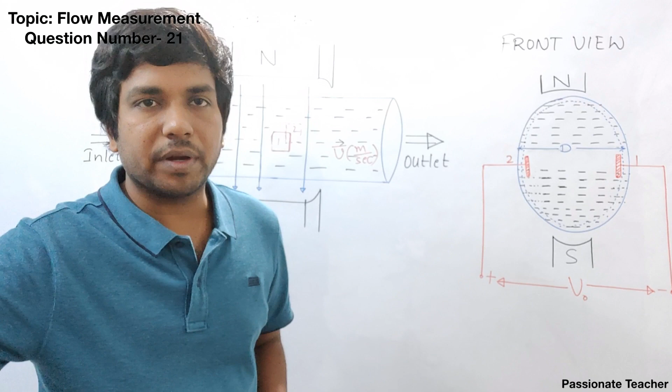A cylindrical pipe will be like this, and inside the cylindrical pipe, we have the fluid which is flowing with some velocity, that is nothing but average velocity V bar meters per second. Now, assume that the diameter of this pipe is D. Just above the pipe, we are going to have the north pole like this, and below the pipe, we are going to have the south pole.

Now, when we have the north pole here and the south pole here, the magnetic flux will travel from north pole to south pole. That means the direction of the magnetic flux is downward, and the velocity of the fluid is like this, from left side to right side. Clear? Now, intentionally, we will place two mounted electrodes inside the pipe.

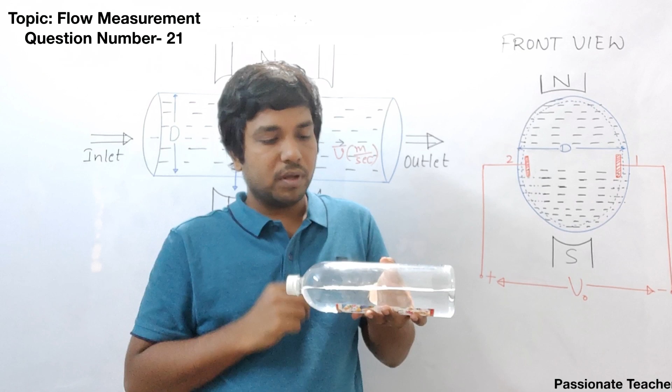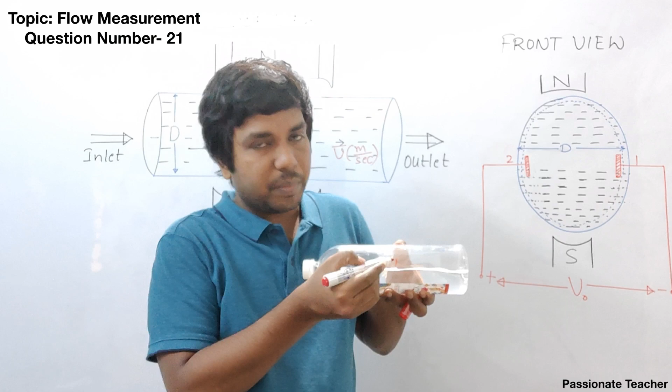That means near this surface, inside, we are going to have one electrode here, and another electrode exactly on the opposite side. Let me name them. The electrode which we place here, let me say that is one, will be pasted here, and on the opposite side, the back side of one, we are going to have the second electrode. So if I turn the bottle this side, you will be able to see the second electrode here, and here you will be able to see the first electrode.

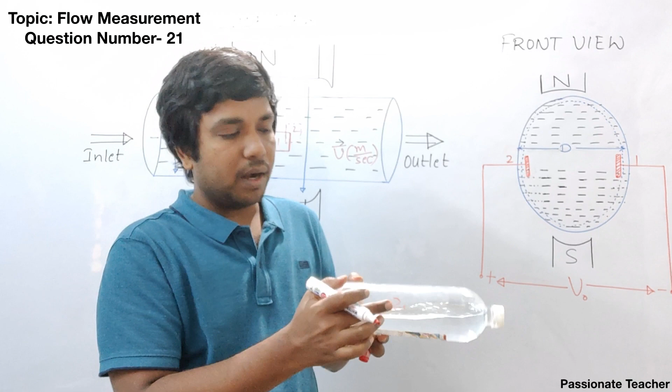Now, as the liquid is moving inside the magnetic field, if it is a conductive liquid, we will get a voltage across terminals 1 and 2. That means if you take a copper wire from here and a copper wire from here and connect a voltmeter, your voltmeter will indicate some voltage if the fluid is moving with some velocity V. Now we will see how the front view looks.

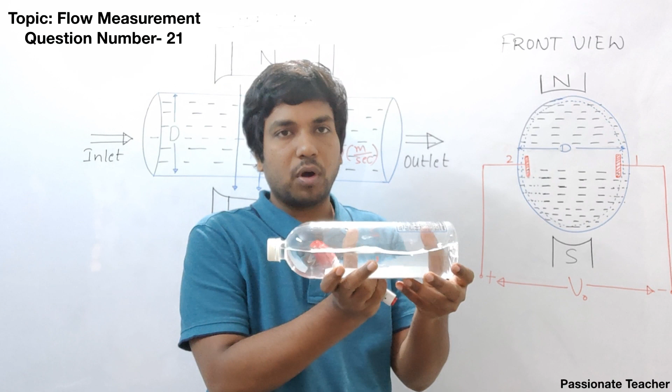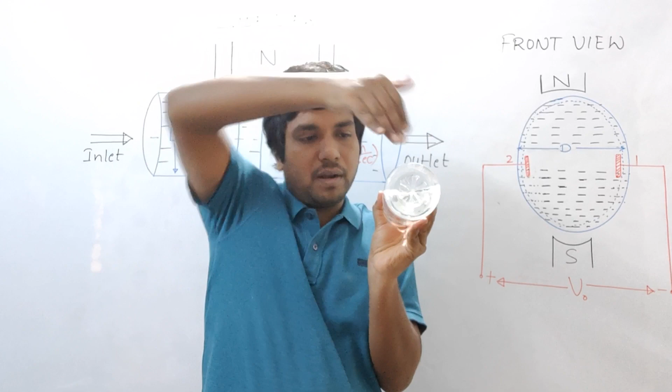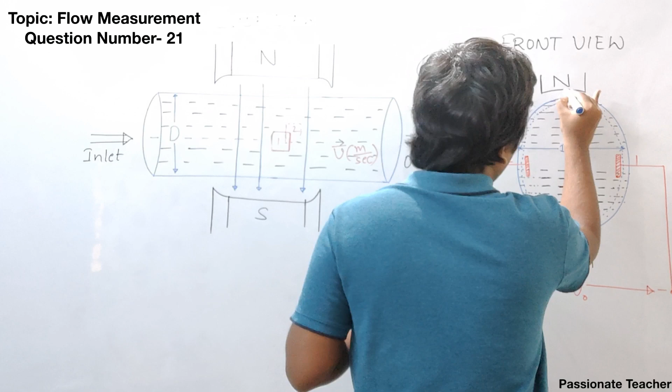The front view looks like this. If I turn this cylindrical bottle, or the pipe, like this, you will be able to see it as a circle. Clear? So the north pole will be here above the pipe, and the south pole will be below the pipe. From the north pole to the south pole, the magnetic flux lines will travel, like this. Clear? Now, as we discussed earlier, the diameter of the pipe is D.

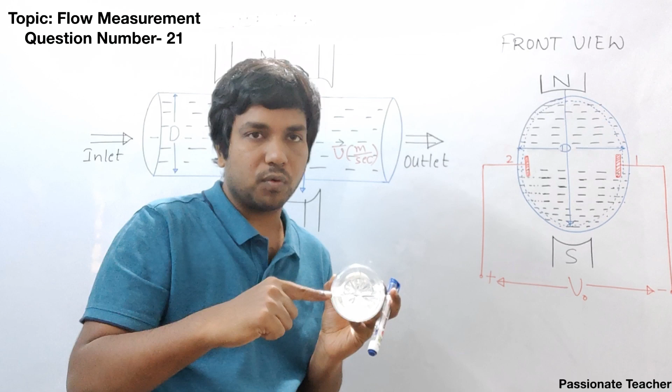Inside the magnetic flux, the fluid is traveling like this. Correct? So what is the length of this fluid frame now? The length of this fluid frame, that means the finger here, from here to here, is the length if you see it from the top view, like this. This will continuously travel inside the pipe. So the length of this finger is nothing but the length of the fluid frame, and that will be equal to the diameter of the pipe.

So in this case, from Faraday's law, the output voltage is equal to B into L into average velocity. Here L is nothing but the diameter of the pipe, because, as I said, the length of the fluid frame flowing inside the pipe is the diameter of the pipe itself. From the top view, this finger length is the diameter of the pipe, multiplied by the velocity of the fluid. So from this, we can measure the velocity of the fluid.

Now the most frequent question is, why do we need to apply a sinusoidal magnetic flux? To understand this, I will explain in the simplest way.

Just pay attention. If you look at the front view, these are nothing but the fluid particles. We know very well that the fluid can be easily electrified. That means we can divide the fluid molecules into positive ions and negative ions. Now what happens is, we have the magnetic flux in the downward direction from north pole to south pole, and the velocity is inside the pipe.

Now look at this diagram. The velocity of the fluid particle is like this, and the magnetic field direction is this way. So the force acting because of this magnetic field on the moving conductor can be given as FB. This is nothing but the Lorentz force equation: FB equals Q into V bar cross B bar. That means charge into V bar cross B bar.

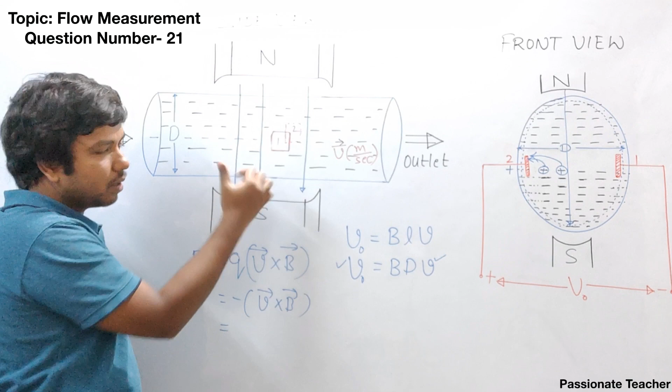Similarly, if it is a negative charge, what will happen? I should multiply this with the negative, so the unit vector will point to this side. We have negative particles flowing like this. If you apply velocity cross magnetic field, the force would be into the board, but as we multiply with the negative charge, this vector will be on this side. So those fluid particles will come and occupy electrode 1. They will be caught by electrode 1.

In the side view, assume these are electrons or negative carriers in the fluid, and they will come and occupy here. So finally this becomes the negative electrode and this the positive electrode. Like that, the fluid particles flowing in a streamline separate into positive and negative ions because of the downward magnetic field. When the particles are separated based on charge, we get some voltage here.

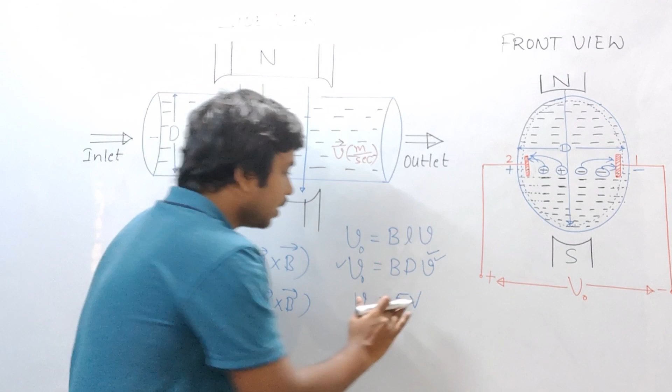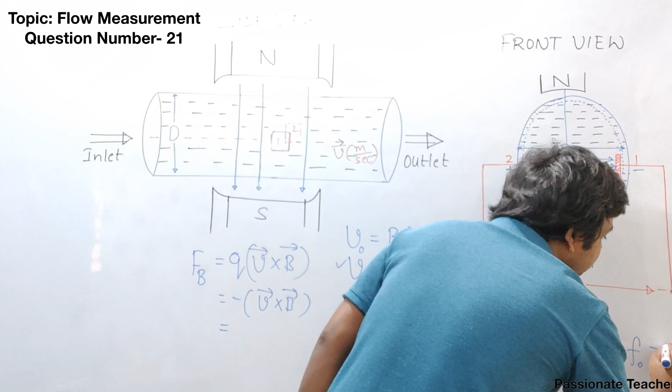Now let us assume for some flow rate V0 equals 5 volt. Actually that's not possible; usually you won't get 5 volt, it will be millivolts. Let me say 5 millivolt. Now this is a DC voltage. If you plot V0 with respect to time, it is 5 millivolt. As it is a DC voltage, the frequency of the output voltage is 0 Hz. That means it is a pure DC signal.

The problem is, when we get the DC output voltage here, it will always be affected by some noise or the interference signal. Interference signal means it is an unwanted signal, but it can be predicted. What happens is, because of the external magnetic field, apart from the actual magnetic flux lines, our voltage will be disturbed. As well, if we use the electromagnetic flow meter for many years, there will be some problem because of the chemical reactions.

That is the reason why we will always have some voltage across this, even though we don't do anything. That is called offset. And that offset also will be affected because of the interference. So finally, we will have some output voltage even if the fluid is not flowing; that is offset. And even if you remove the offset, because of the external magnetic field, which is considered interference, the output voltage is going to fluctuate like this. That means this is an unwanted signal.

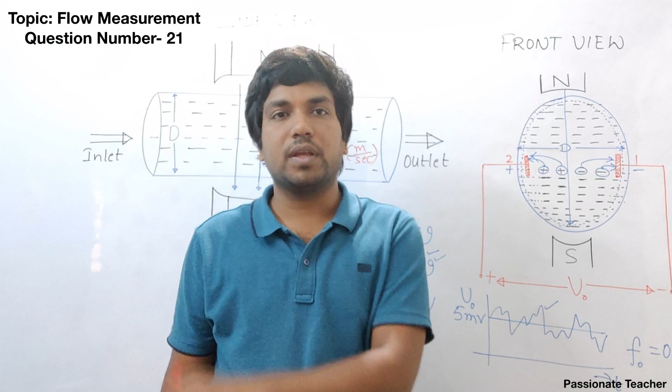So as time progresses, it is 5 millivolt at some location, maybe 6 millivolt at some location, and it may be 4 millivolt at some location. Like that, there will be some fluctuation in the output voltage, and this interference will always damage the DC voltage. This is the reason why it is very difficult to handle the low frequency output signals from our sensors. So what do we need to do now? We need to get the output voltage as AC. That means we are forced to get the output voltage as AC.

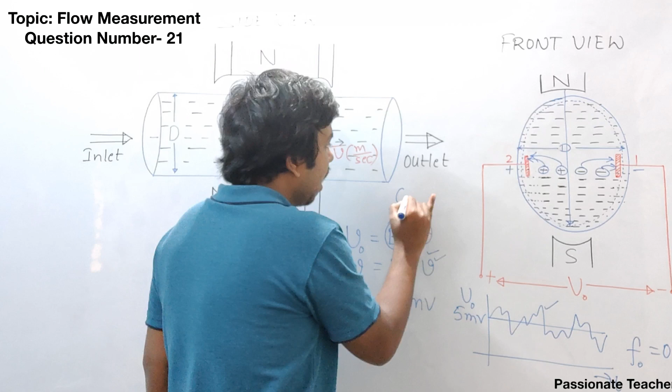This is possible because we cannot say velocity should be AC or DC, right? It is in one direction now, and length we cannot change with respect to time. Now the only option is to change the magnetic flux with respect to time. So we need to apply an alternating magnetic flux here. When we apply alternating magnetic flux, sometimes it will become north pole, and after some time it will become south pole.

So suppose the magnetic flux is sinusoidal like this continuously. When this magnetic flux is applied, in the first quarter it will be north pole here and south pole here. And in the reverse of the magnetic flux, we are going to have south pole here and north pole here. So in that case, the magnetic flux lines will continuously change.

If the magnetic flux lines are continuously changing, as I said earlier, if the magnetic flux direction is like this, north to south, then the positive ion will be here, the negative ion will be here, and V naught will be positive. Suppose the magnetic flux lines are reversed: we keep the south pole here now in the second case, and here we change it to north pole. Then the magnetic flux will travel from north pole to south pole. In that case, the reverse action will take place.

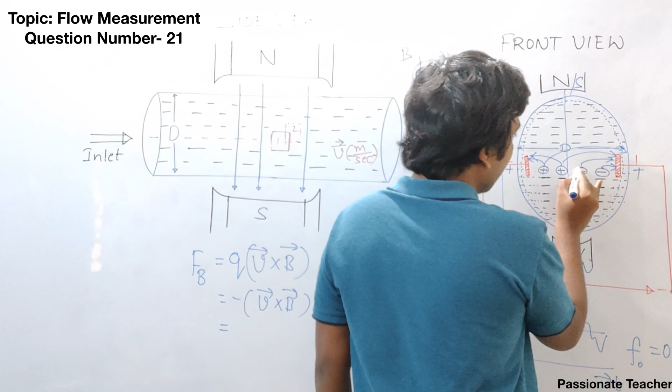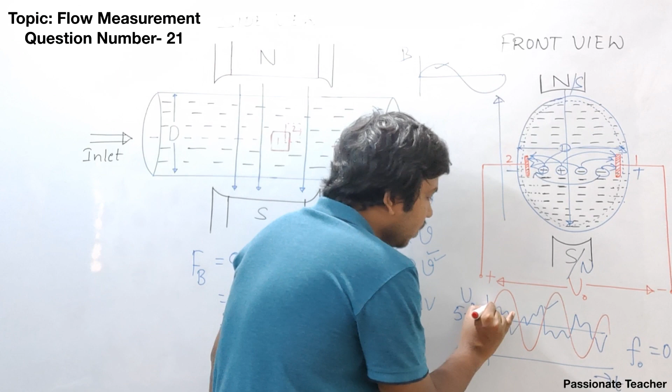That means the positive ions will come to this side now, and this will become positive, and negative ions will come to this side, so it will become negative now. So if you connect the voltmeter here, now it will show a negative voltage. That means now we don't get DC voltage; rather we will be getting AC voltage like this. Now if you get AC voltage, the interference will still affect it like this.

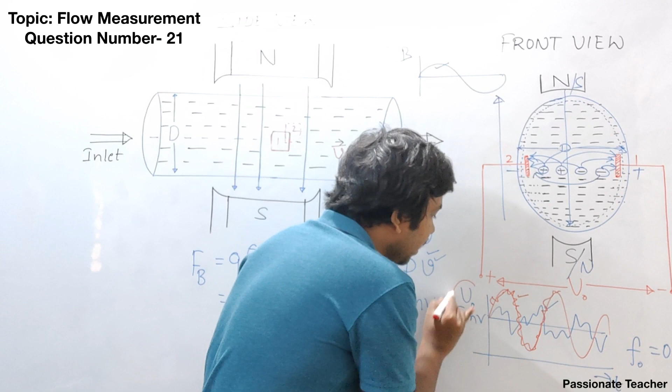But as the frequency of this output voltage is comparatively high when we apply AC magnetic flux, interference cannot disturb this AC output voltage. So to overcome the problem of the interference signal, we generally apply time varying magnetic flux. When we apply time varying magnetic flux, the advantage is we get an AC output voltage which can't be disturbed by the interference signal. This is the advantage of time varying magnetic flux.